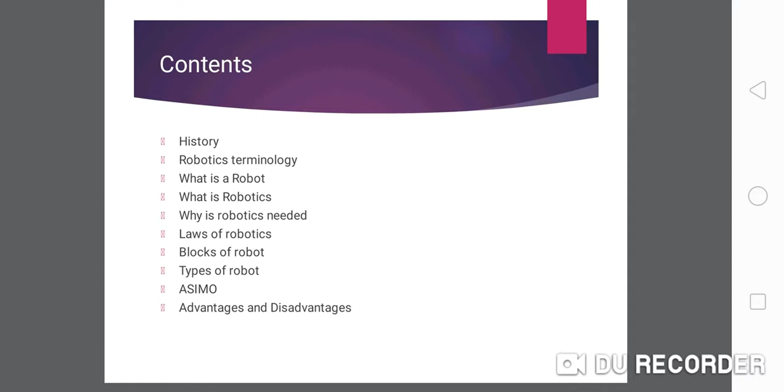Here are the contents of my topic. We will discuss the history of robotics, what is robotics, and more, as you can see.

First, the history. The term robot was first used in 1920 in a play called R.U.R. by Czech writer Karel Čapek.

Robotics terminology: Robot. What comes to mind when you hear the word robot? Some people may have a misconception that only big machines can be considered robots. That's wrong. The simplest definition of a robot is that it's a mechanical device that performs human tasks, either automatically or by remote control.

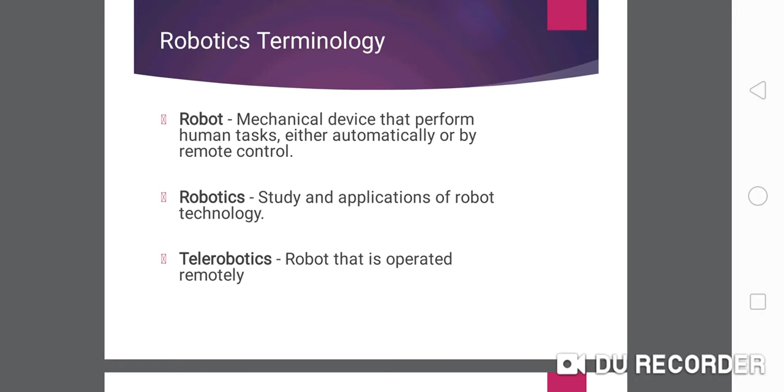What is a robot? A reprogrammable, multifunctional, automatic industrial machine designed to replace humans in hazardous work.

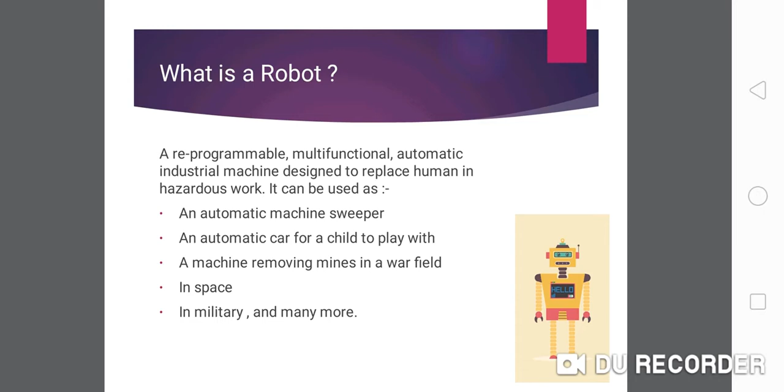It can be used as an automatic machine sweeper, an automatic car for a child to play with, a machine for removing mines in a war field, in space, in military, and many more applications.

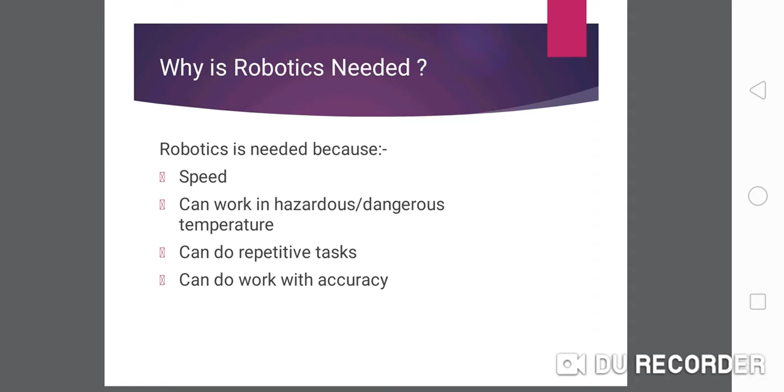Laws of robotics. Asimov presented 3 laws of robotics and later added the 0th law. Law 0: A robot may not injure humanity, or through inaction, allow humanity to come to harm.

Law 1: A robot may not injure a human being, or through inaction, allow a human being to come to harm, unless this would conflict with a higher order law.

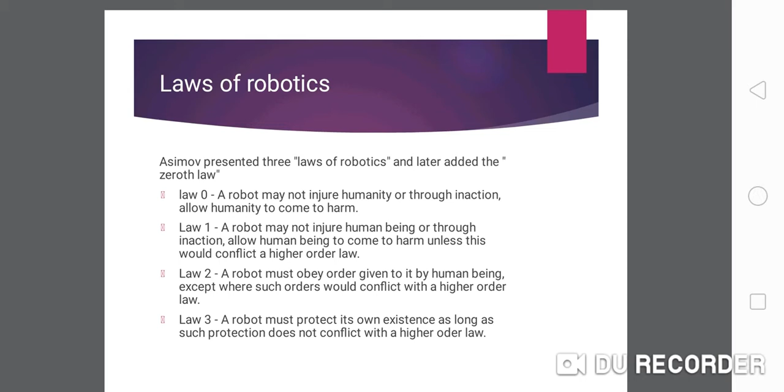Law 2: A robot must obey orders given to it by human beings except where such orders would conflict with a higher order law. Law 3: A robot must protect its own existence as long as such protection does not conflict with a higher order law.

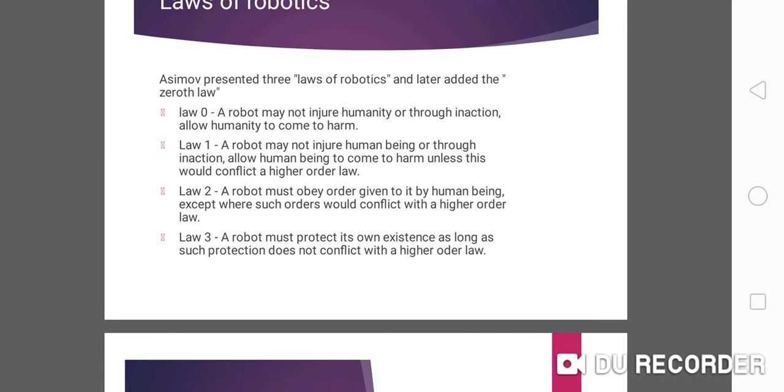Blocks of robots. Here are the blocks of robots. You can see sensor, power supply, controller, and actuator.

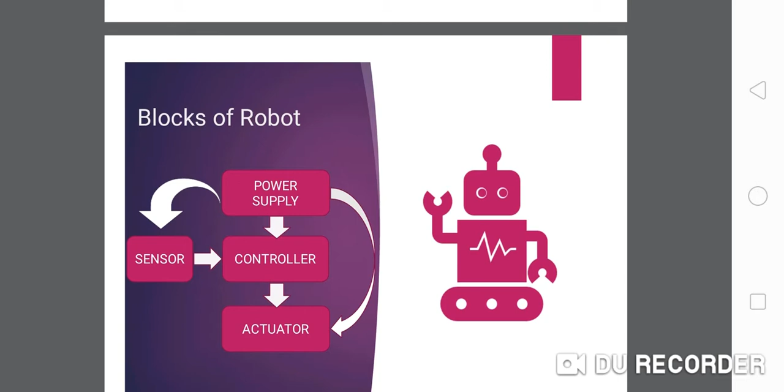Let's come to the sensing unit. Sensor. You know, we humans are independent to an extent because of our senses. Then for the robots to be independent, what we will need is to be totally independent or autonomous. I mean, robots should work on its own without any human interference. Most of people will agree that it merits intelligence. This intelligence is imparted by us humans. Is it enough? Well, of course it's enough. Robot will work with that, but it will be isolated from the outside world.

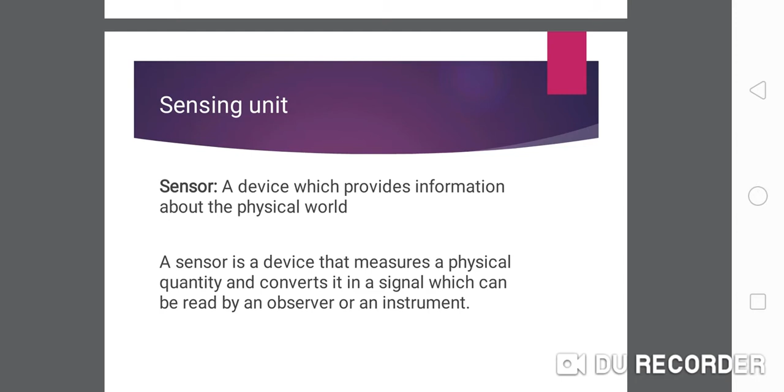For it to be interactive, we implant sensors. A sensor is a device which provides information about the physical world. A sensor is a device that measures a physical quantity and converts it into a signal which can be read by an observer or an instrument. Physical quantity like temperature, pressure, heat, magnetic waves, etc., and sent to process.

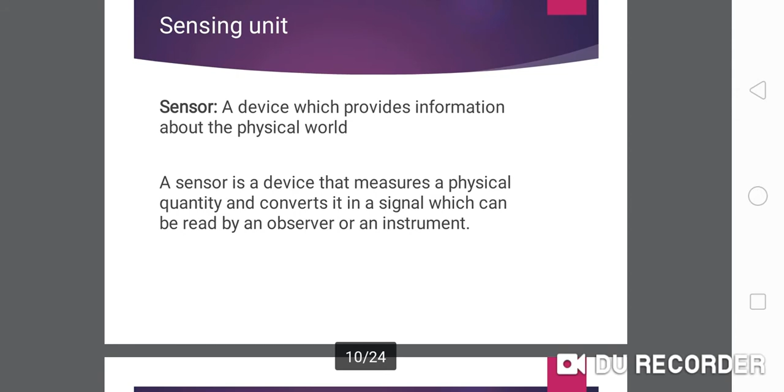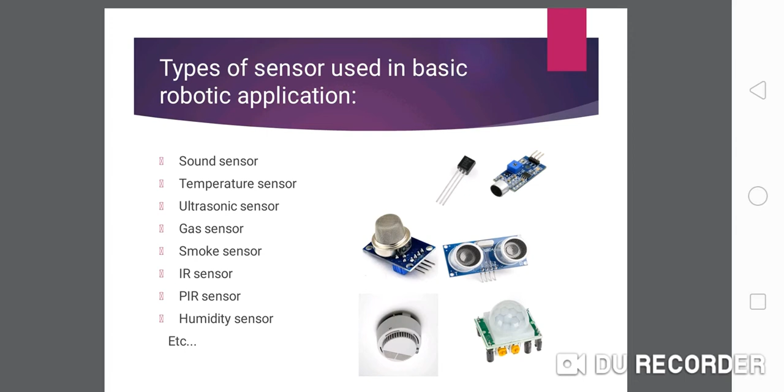Types of sensors used in robotic application. There are so many types of sensors. Some of them are sound sensors, temperature sensors, ultrasonic, gas, smoke sensor, IR, and etc.

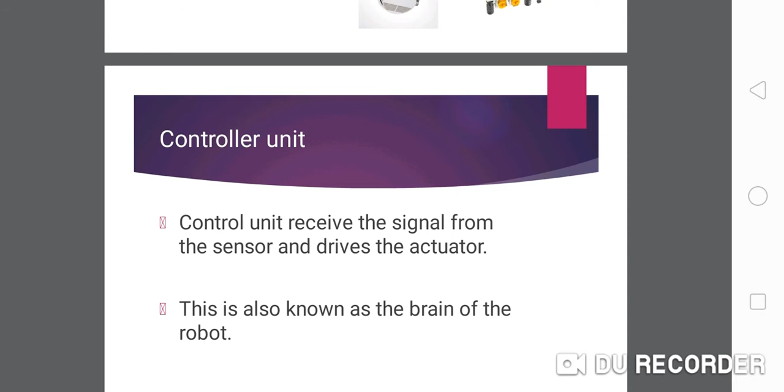Control unit. Control unit receives a signal from the sensor and drives the actuator. Control unit is the major governing system of a robot. Every system that is inside the robot can be represented in the form of a control system. This is also known as the brain of the robot.

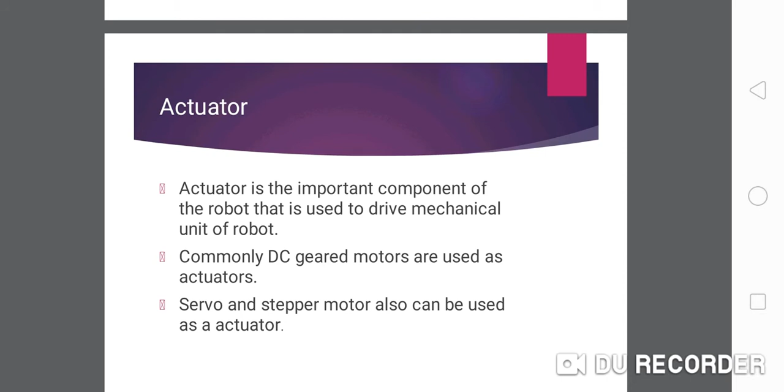Actuator. Actuator is the most important component of the robot that is used to drive the mechanical unit of the robot. We need devices which convert electrical energy into mechanical energy, and for that we use such devices called actuators. Commonly DC geared motors are used as actuators. Servo and stepper motors can also be used as actuators.

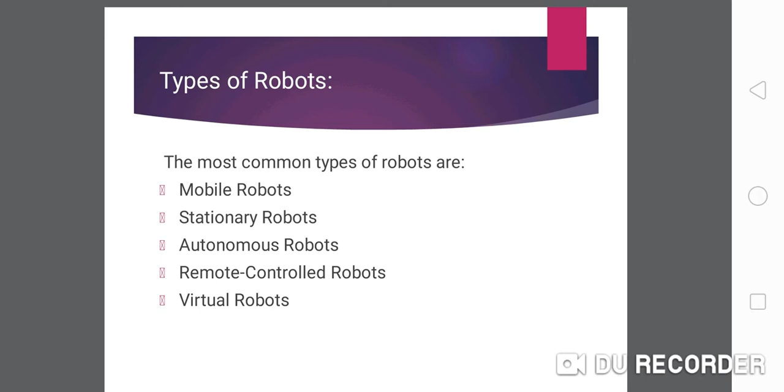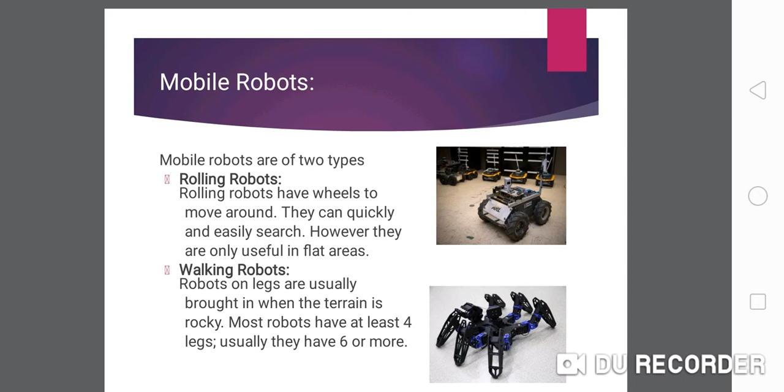What are mobile robots? Mobile robots are of two types: rolling robots and walking robots. Rolling robots have wheels to move around. They can quickly and easily search, however they are only useful in flat areas. Robots on legs are usually brought in when the terrain is rocky. Most robots have at least 4 legs, usually they have 6 or more.

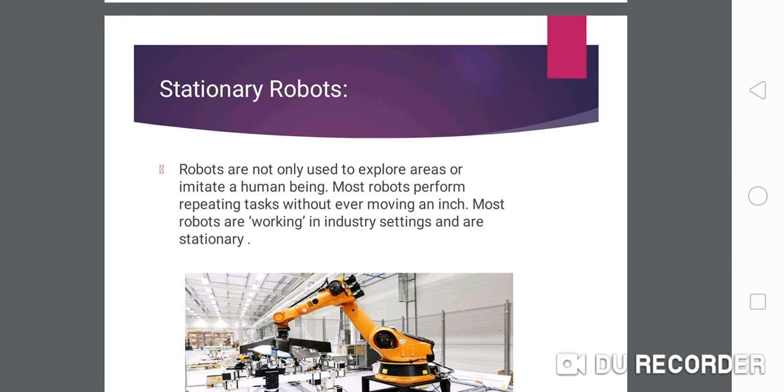Stationary robots. Robots are not only used to explore areas or imitate a human being. Most robots perform repeating tasks without ever moving an inch. Most robots working in industry settings are stationary, as you can see in the figure.

Autonomous robots. Autonomous robots are self-supporting, or in other words, self-contained. In a way, they rely on their own brains.

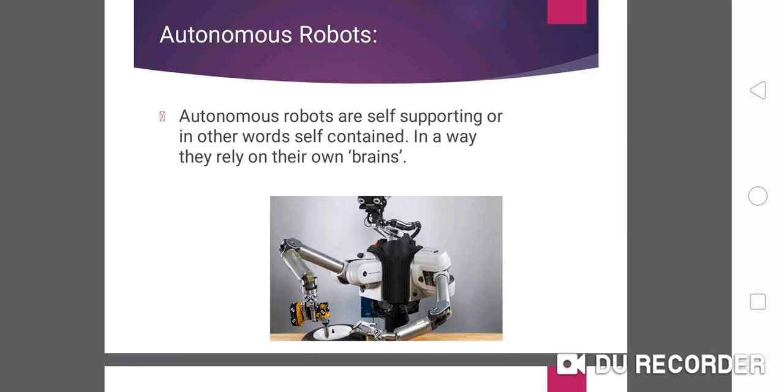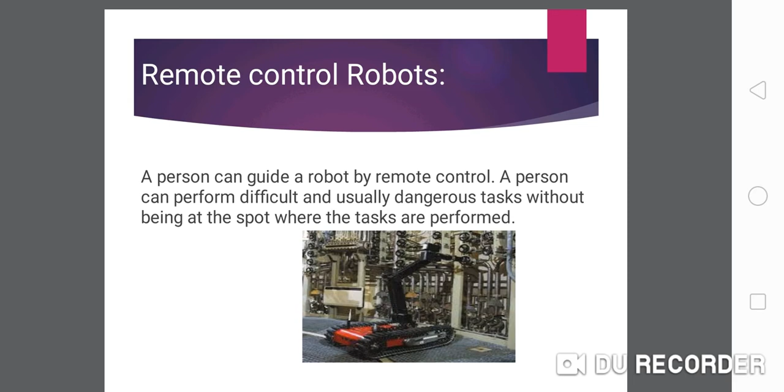Remote control robots. A person can guide a robot by remote control. A person can perform difficult and usually dangerous tasks without being at the spot where the tasks are performed.

Virtual robots. Virtual robots don't exist in real life. Virtual robots are just programs, building blocks of software inside a computer.

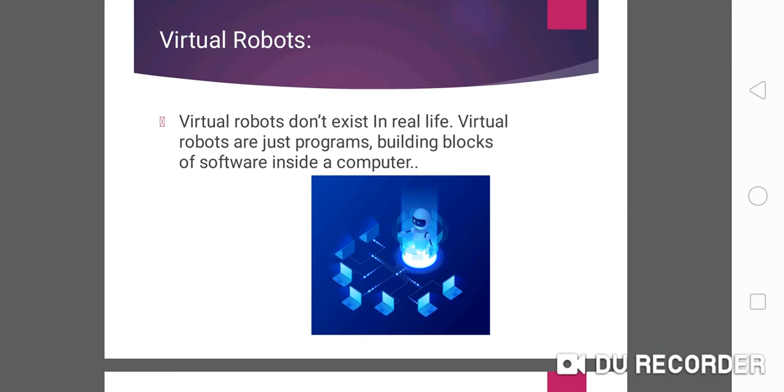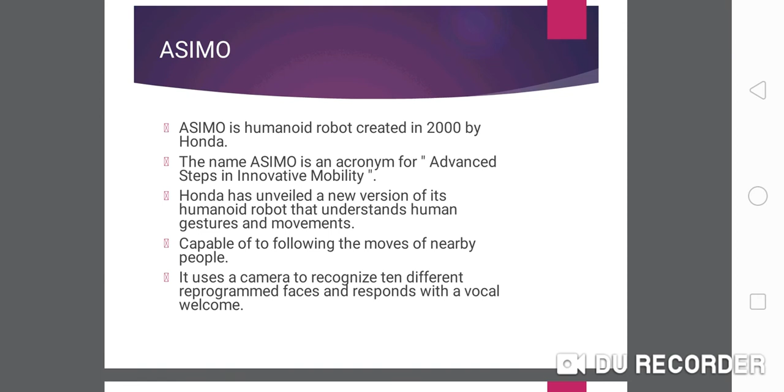ASIMO. Now what is ASIMO? ASIMO is a humanoid robot created in 2000 by Honda. The name ASIMO is an acronym for Advanced Steps in Innovative Mobility. Honda has unveiled a new version of its humanoid robot that understands human gestures and movements, capable of following the moves of nearby people. It uses a camera to recognize 10 different preprogrammed faces and respond with a vocal welcome.

Why is ASIMO the most intelligent? It can work like a person: cooking, cleaning, recognizing nearby people, understanding human gestures and movements. It can understand the problem and work accordingly. It is used for entertainment as well as other necessary useful works.

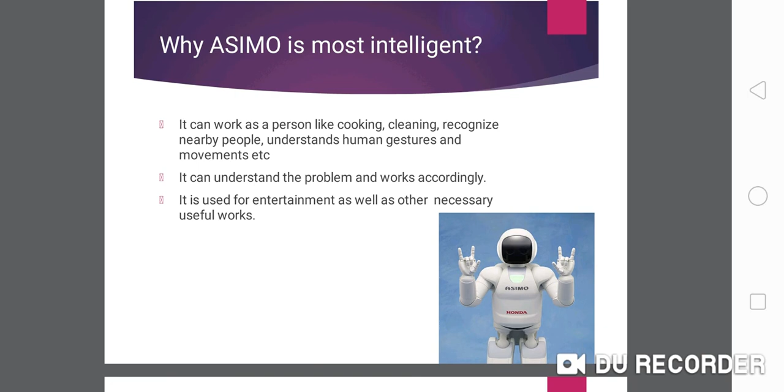You know, everything has advantages and disadvantages. Robots perform each task with speed and accuracy, giving us information that we can't. They don't get bored, and can work in dangerous, hazardous environments. Like we can explore space, we can explore volcanoes. It is so dangerous, but we can do it with robots.

Robots can multitask and don't need experience. Disadvantages: people can lose jobs in factories, it needs a supply of power, it needs maintenance to keep it running, and it costs money to make or buy a robot.